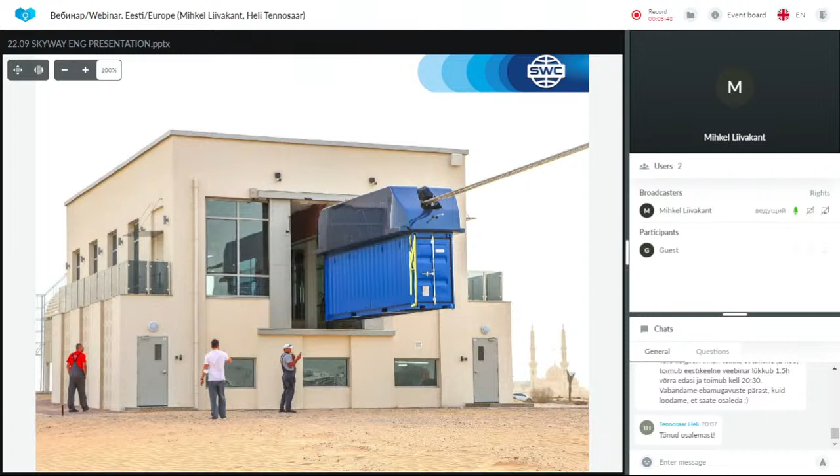Here is also a sea container, a smaller one, and this technology already works. The French television and French people were very excited, and after this model was first shown to the public, it was also announced that the commercial cargo track is going to be between the city of Sharjah and Khorfakkan, about 100 kilometers.

I would like to describe what this picture reminds me of personally. Today, in the 21st century, we have a perfectly well-developed first level infrastructure — by first level I mean the ground floor. We also have, in most bigger cities, metros or subways beneath the ground, but traffic problems still occur. Therefore, the world needs a new solution, because we just cannot tear down the buildings inside cities to construct new roads.

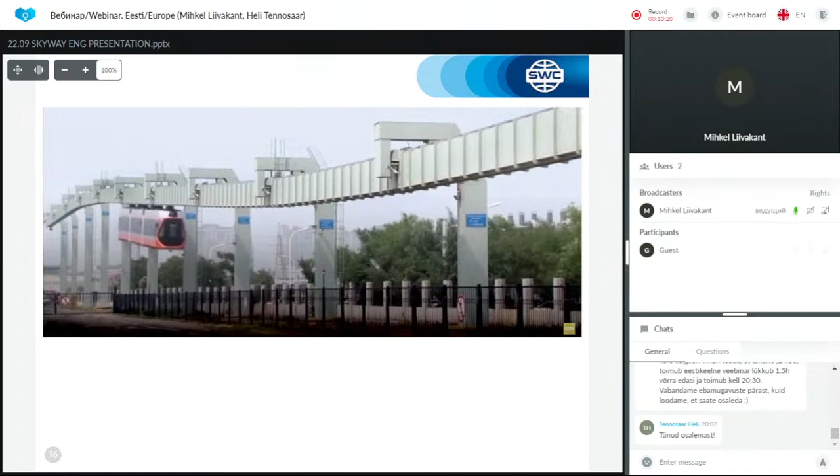Then, of course, metros and subways. In Germany they have this technology used. In China they have this. It's basically like a tram, upside down. And then here, this is like a Doppelmayr,

one company that is basically implementing its technology all around the world. But what we must know with this cable car technology is that the car itself doesn't move, but the cable moves. So the car is attached very tightly to the cable, and then the cable moves.

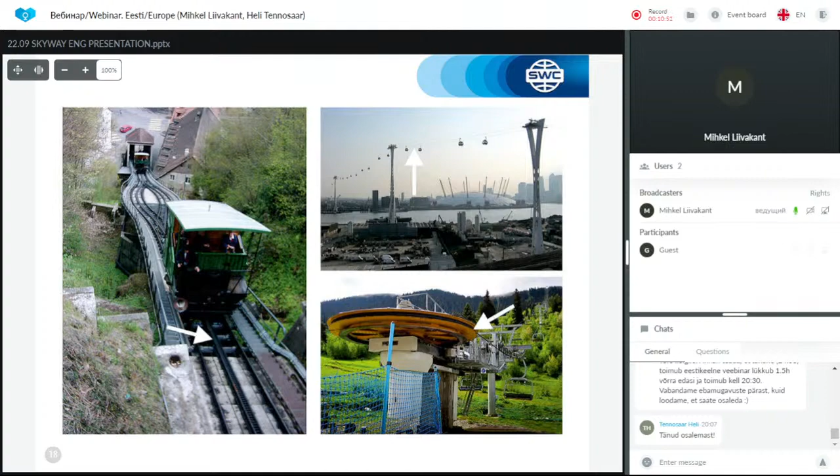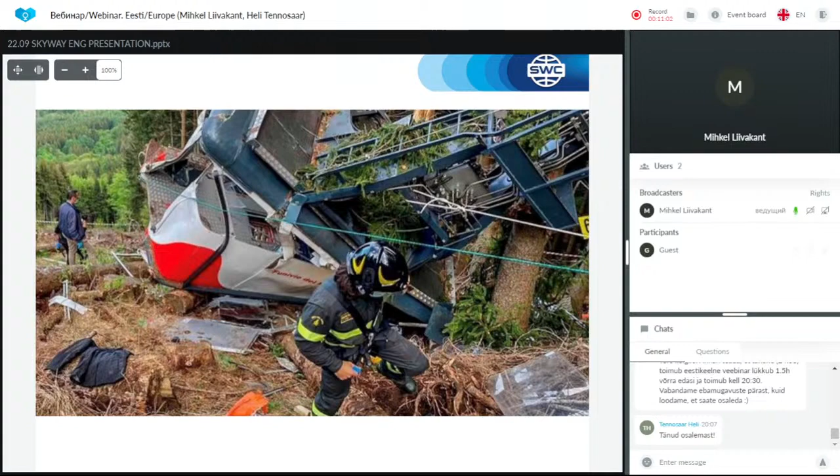And here I would like to show you one. This is in Italy, an accident, and I will show you why it's quite dangerous. So basically there was some malfunction in the system and it started to collapse. And this is not the only accident like this, there have been many more. So this is basically the Doppelmayr technology.

Yes, all right, let's continue now. Let's go to the new age, to the 21st century. This is what I would like to introduce to you today in more detail, in 7 points. I will briefly introduce you to all the main aspects of SkyWay technology, and why it precedes all the other technologies that I know exist in the world.

And therefore I'm more than sure that we will see SkyWay riding around inside cities and between cities, and soon we will be able to drive as passengers as well when we go on holiday, for example, because it just has so many more benefits. But all right, let's see.

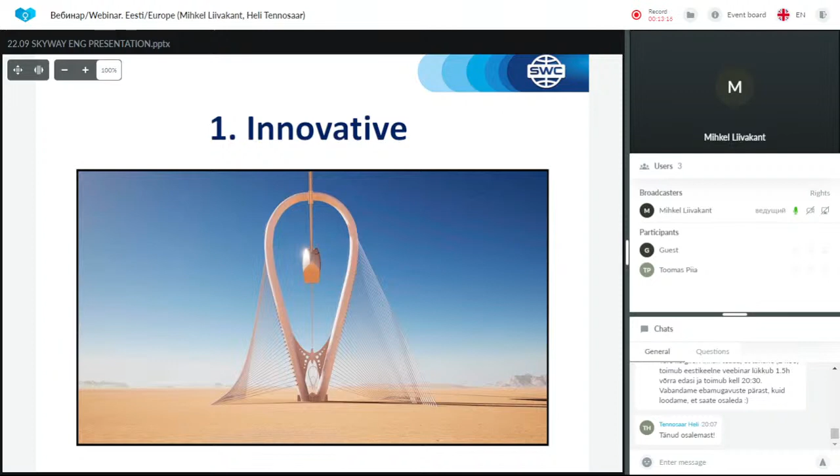First point is that it's innovative, and absolutely true. It uses electricity, it has its own batteries, and it has its own motor wheels, which take the models, for example on this picture, the Unicar, from point A to point B. That means the cable does not move, nor the track structure, but the track structure stays stiff in the same place. And of course the designs can be different for supports and so on.

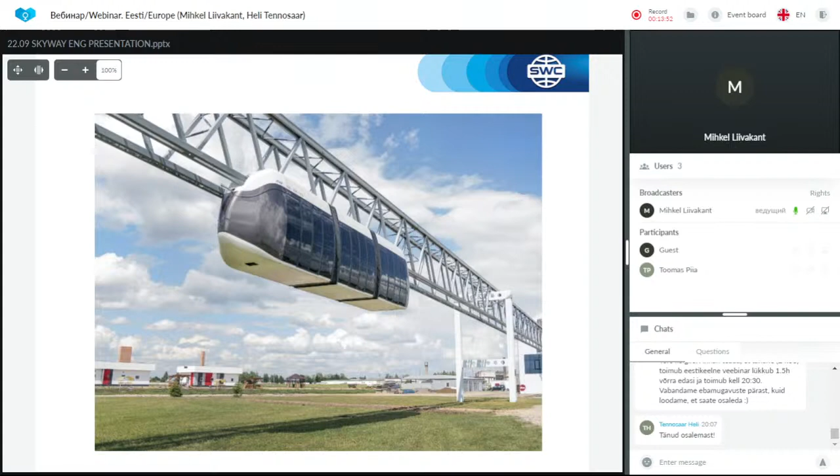It's just a matter of designing and necessary measurements, by which it's possible to implement these technologies. For example, in my country, in my city called Tartu, which is a university city, I believe it's possible to use the statues instead of supports, or as supports.

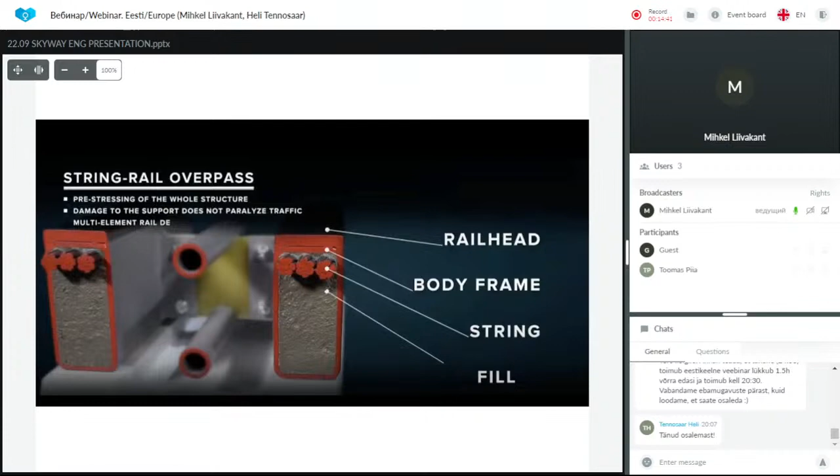And the patented part of that rail track structure is here. So basically these technologies all exist in separate combinations, but combined like you see on this picture right now, the pre-stressed strings are put inside the body frame, or inside the rail, and it's filled with special filler. It's also possible to take pipes or tubes through the track structure, so we can take internet cables or electricity and so on through the track structure as well. So it has multiple benefits.

And this is one screenshot from EcoFest 2019. This is a short 1-minute movie I also made, and you can take a look at it on my YouTube account. If you put my name into YouTube, you will see the videos I have uploaded. There are videos from EcoFest, from Sharjah, and also from near Minsk, Marina Gorka. So many videos - I have been to both of these places twice.

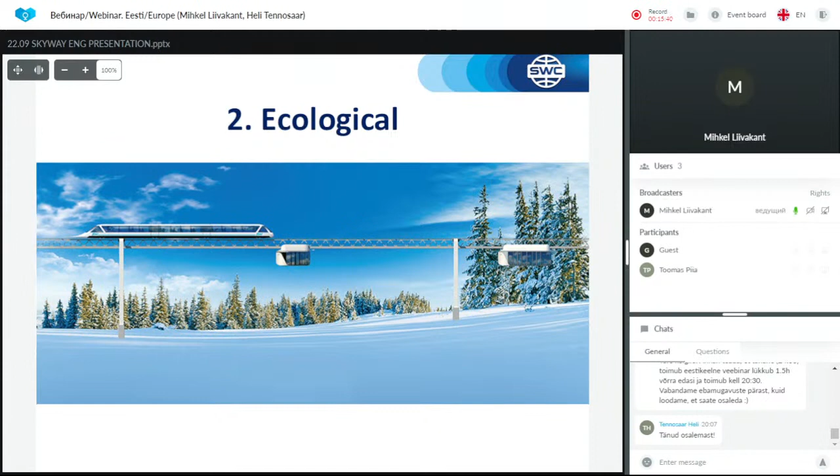The second point is that it is ecological technology, and as you can see on this picture as well, it just perfectly blends in with nature. It's very neat, it's sharp, it's clean - it's not robust or very massive as the other technologies I showed you were. So therefore it's quite great.

And of course another ecological part is the production of CO2, which is taken to the minimum because SkyWay uses electricity. And it's possible to implement solar panels as well, and then wind turbines on the track structure, so it can produce its own energy, or produce it for the surrounding area, which is quite awesome.

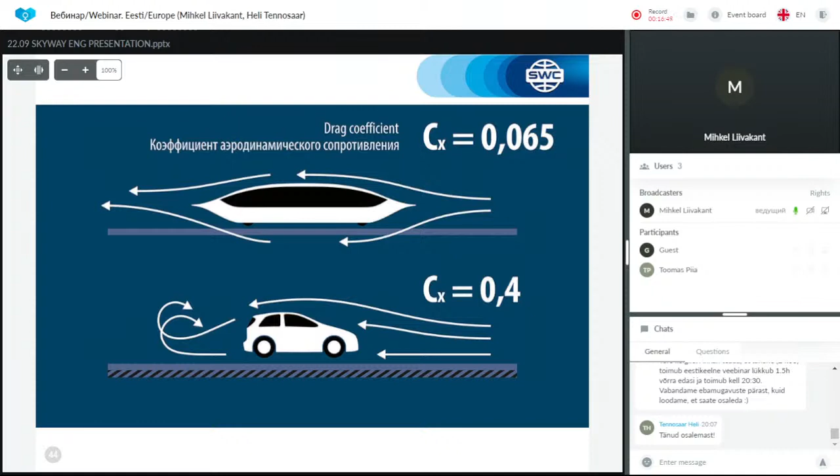Then the wind resistance level is also taken to a minimum because of the shape of the body. It's designed so perfectly to cut the wind. The other aspect is that there is no road, so to say, beneath SkyWay models. There is a track structure of rails, but the wind can go beneath the rails very well. Instead, if we think of driving a car, there is a road, and that rises the wind resistance levels due to the screen effect.

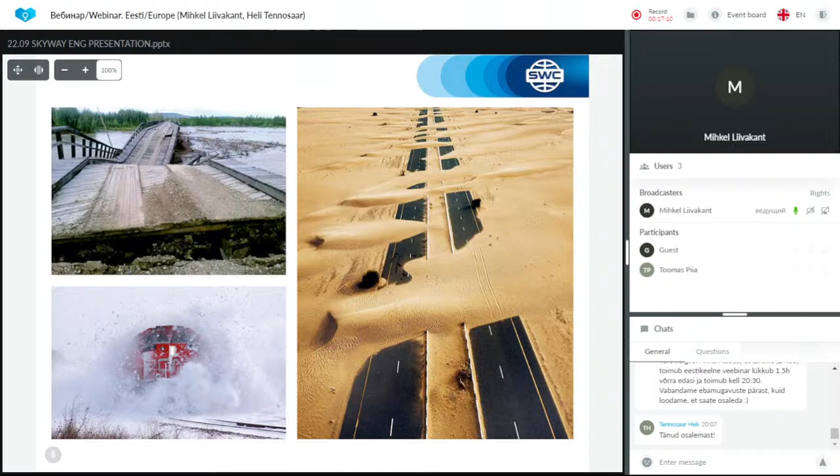And what is more, there are all different kinds of first level, or ground floor, problems that occur that need to be maintained and so on. So all this takes an enormous amount of resources.

And of course, when we construct new roads or new railroads on the ground, we first need to dig about 7 meters beneath the ground, fill it with special filler, take down the forests and so on to clear the path, for example, for 200 kilometers. And then there will also be fences, a track structure on one side of the railroad from beginning to end for safety and maintenance. So it's an enormous amount of land that this construction allocates.

But if we take SkyWay, for example, we just put supports on the ground. If you take the Unibus, which rides on a string, not on a rail structure as I showed before, like the track structure, the 400-meter one which is ready in Sharjah - with that track structure, we can place the supports after every 400 meters or even longer. Therefore, there will be land left to fill with grass and animals and so on.

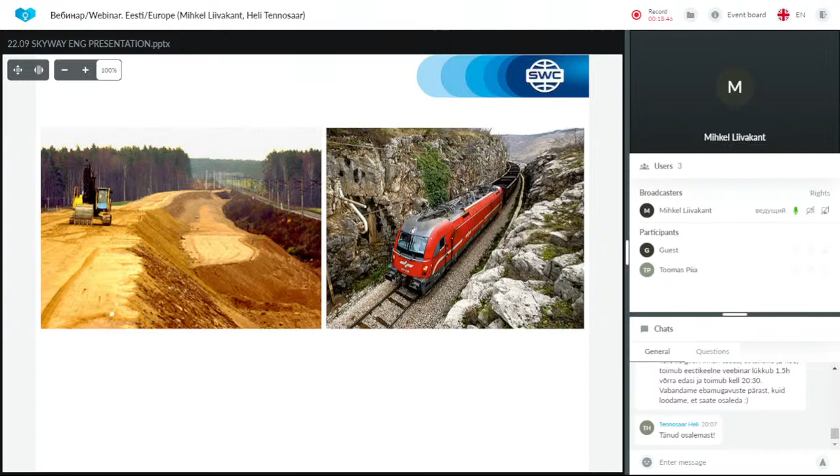And the same goes inside the city. So it's perfectly safe because it doesn't collide with first level technologies like cars, trams, trolleys, buses, or whatever these technologies are. So it doesn't collide with them, and since it's on the second level, there will be no accidents.

And of course, water is no obstacle for us. It's possible to solve it with longer supports that go into the water. And also we can take special plateaus, or construction - a floor on the sea up to 5 kilometers from the coastline - and when the ship comes with cargo, it can put down its cargo onto the plateaus, and then the SkyWay technology brings that cargo to the ground, which is also great.

Because if you Google how much, for example, China spends to construct new shipyards or ports, you will be astonished like I am, because it's an enormous amount of land again that goes under construction, and coastline is very precious land as well.

All right, let's see what we have here. Oh, of course, traffic jams. I mentioned earlier that almost every grown-up person has their own car, and that causes new problems in the economy, in the infrastructure, and in moving around.

Inside bigger cities, it's quite impossible to drive normally at 50 kilometers per hour in rush hours. It's more like 5 to 10, and it takes hours to get home from work. The situation is crazy, but there's no great solution yet, because otherwise people wouldn't use cars. So what technology solves this problem so people choose SkyWay instead of driving to work or home?

So why not, if it looks so great? Just take a look at it. It's just amazing, isn't it?

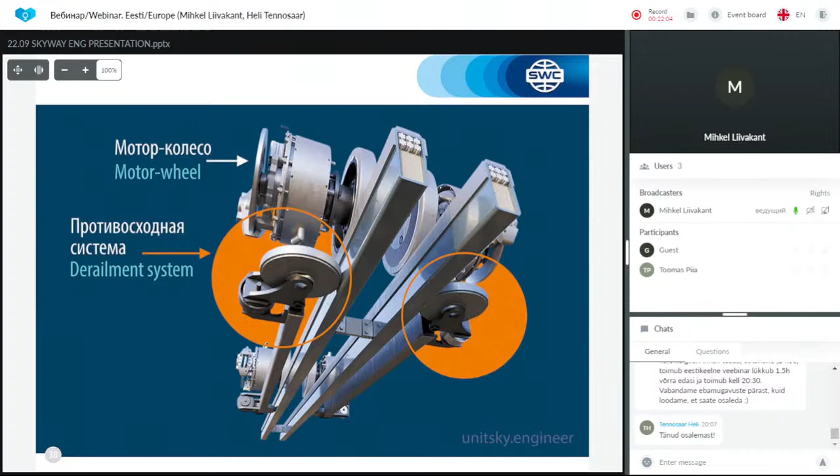All right, now we're getting into safety. I can say, hand on my heart, that it's very safe. There was a collision with a tractor when they first started certification processes in Marina Gorka, at the first demonstration certification center. Everybody survived, but the tractor cabin was quite damaged. The unibus cabin was a little off balance, a little under an angle, but it was still holding strongly and it was possible to move it back and forth. So that already showed how strong it is, and it stays on the track. Even if we lift it upside down, it still stays on the track.

Then, of course, we have 360 degree cameras. It's basically lasers that touch the surroundings and scan constantly. So if any obstacle arises in the way, it immediately stops and sends a signal.

And if something happens with the model in the air, there's a solution where exactly the same model comes to the site, they attach nose and tail, and then the damaged model can either be pulled or lifted to the station. If that solution is also not possible, there's always a hope, and always a solution. Then we just put straps around our waist, and we can lift ourselves down perfectly.

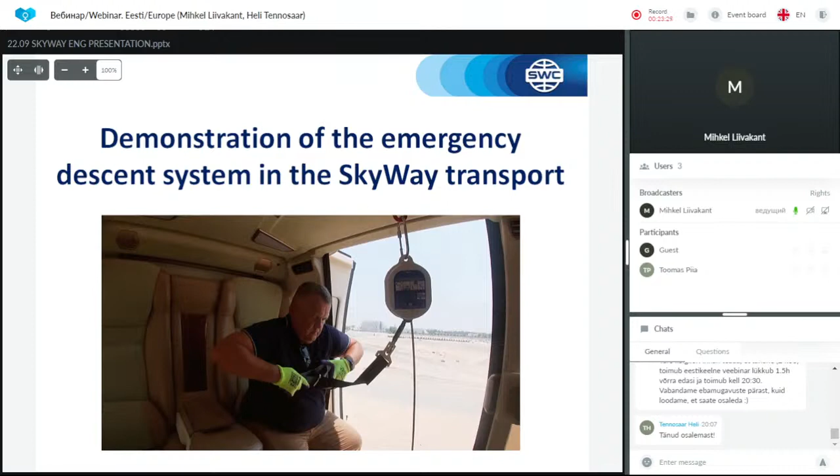There's even a video where a SkyWay crew member demonstrated how he took the safety kit from underneath the seat, attached everything, and then lifted himself down. As you can see, he's quite a big man, so it's definitely interesting to watch. Just go to your personal back office and you can see it there. It's 100% safer than riding with other technology, I believe.

And now I'll show you a video about some technologies that are there in the world. Many of you have probably already seen these videos, but just in case, take a look.

And the woman would be stuck. So I believe you get my point.

I'll just show you one more video about what's going on in Japan. There are Japanese guys hired to push people inside the train so they can get on board.

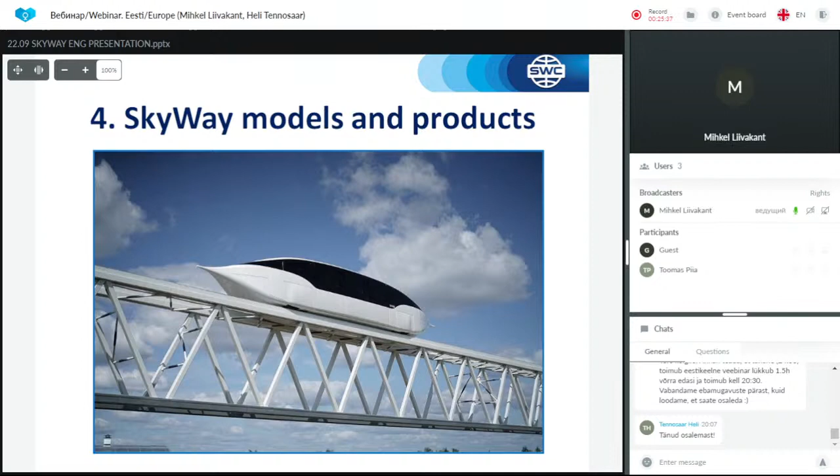Yes, as you can see, it's crazy. All right, I hoped I opened someone's eyes, or at least reminded them what's going on in the world. I hope you'll think about this and see how great SkyWay technology actually is.

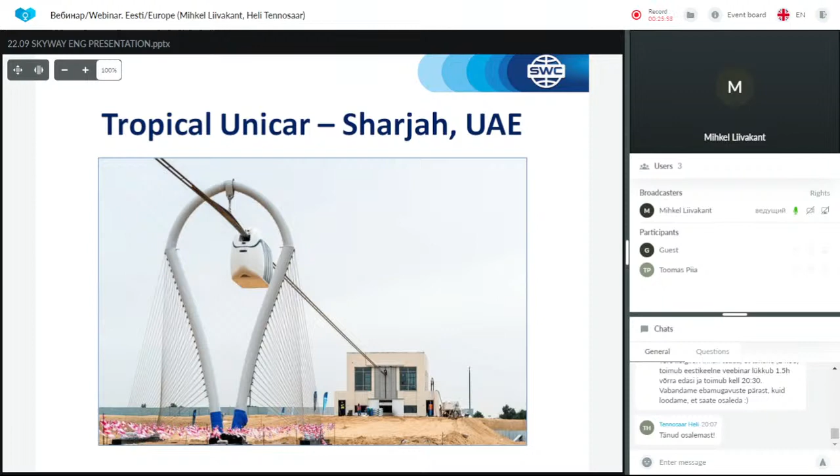The fourth point is that we actually already have our own models certified. We have both commercial models that take people from point A to point B, and also cargo transport models for goods, and here, sea containers.

This is amazing, and I'll show you on this slide the great benefit of this technology. Basically, the biggest benefit, I believe, is that we can go in both directions, or different directions, at the same time. If you think about a train track on the ground, the train can only go on one track structure at a time. But here with SkyWay, when it's uplifted, the track structure can go above and below.

Then the unloading time is under 1 minute, which is quite fast. And the speed is about 80 to 90 kilometers per hour, compared to the average speed for trucks or ships, which is about 10 to 20 kilometers per hour.

There are all kinds of traffic jams and different aspects that take down the average speed of the technologies that are currently in use. But SkyWay is much more efficient.

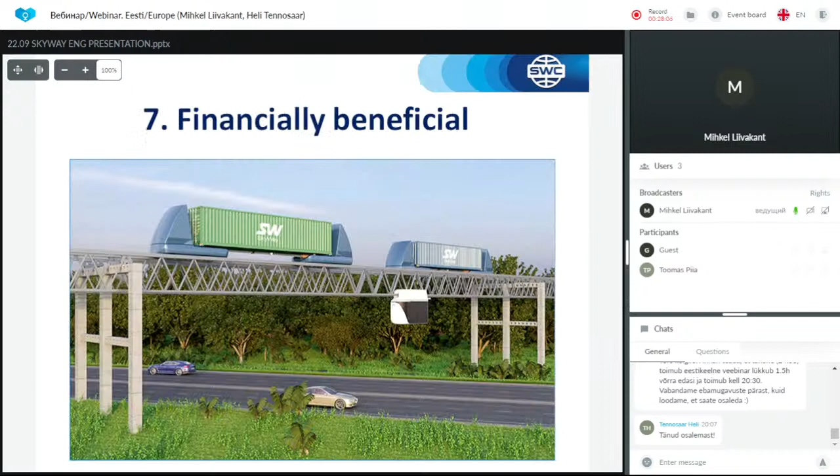Point 7, the final point, is that it's financially beneficial. The main party here is the customer, because comparing with other technologies, they can save up to 10 to 20 times their money, and make it back much faster with SkyWay than with other technologies. And of course, it's then beneficial for the company as well, for SkyWay itself, and therefore for its investors.

But now let's see the news. As I mentioned in the beginning, the Khorfakkan track structure was announced, about 100 kilometers. Let's see when it will be ready, because that one is for sea containers, and sea containers have to be certified as well before. So we need a track which should be ready in upcoming months, and after that the certification process can begin for the model itself.

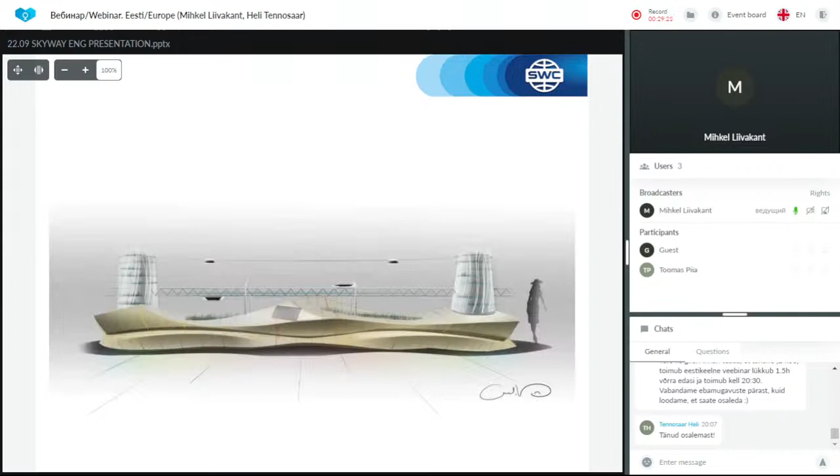Then the other huge news is that we will take part in Expo in Dubai, and if you have the chance, go there definitely and see it all with your own eyes, because in the Expo City Mall hall, there is this mock-up for SkyWay, and it looks like this. It's also quite great, and all these models drive there on the tracks and so on.

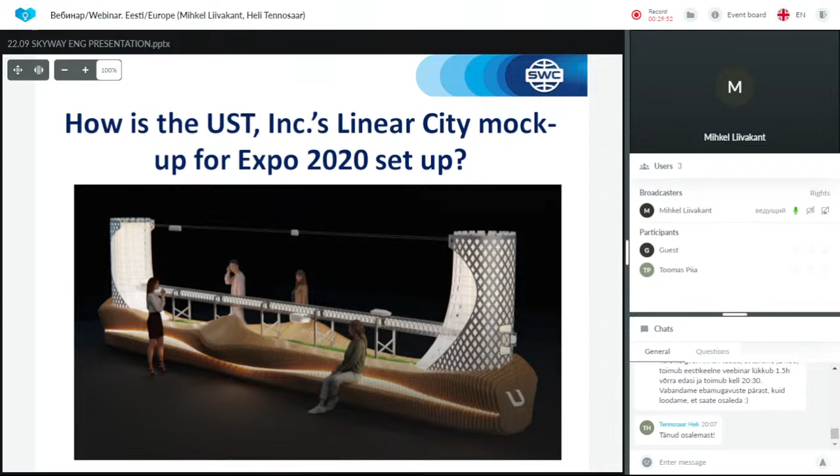And if anybody is more interested, they can also go to the Sharjah Innovation Center, which is about 50 kilometers from Dubai, and go see this with their own eyes. So this is a great chance and opportunity to go and rest, take a holiday, and also visit this Expo and the Innovation Center, which I definitely recommend.

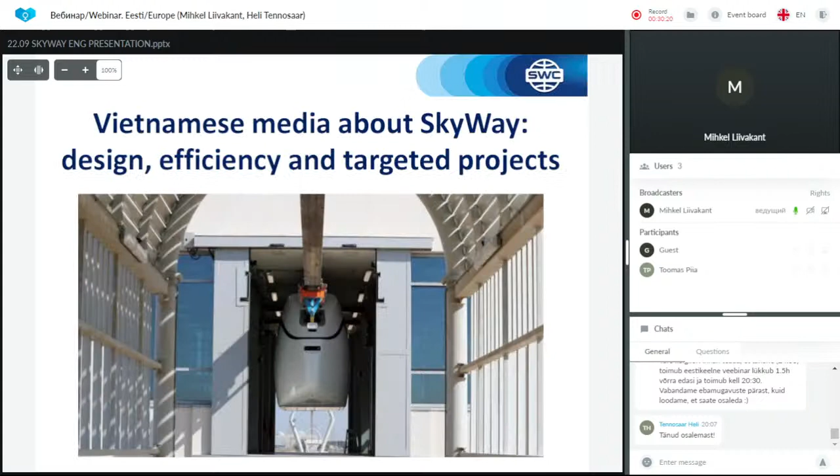We have been in international media several times lately, all around the world - most definitely in the United Arab Emirates, then in French, Indian, United States, Australian, Romanian TV, and also in Vietnamese media. We were presented, and also in Korean media as well. So we have been all around the world, which is absolutely amazing. People hear us and see us, and they welcome us.

Then the financial audit of Unitsky String Technology was published, publicly uploaded for people, investors, and whoever might be interested in this great audit document. So it's possible to see what are the incomes and outgoes of money.

And this is the news I wanted to show you, because after certification was announced, diplomats from 20 countries were visiting the center in Sharjah, the Innovation Center. So the ring is very hot there.